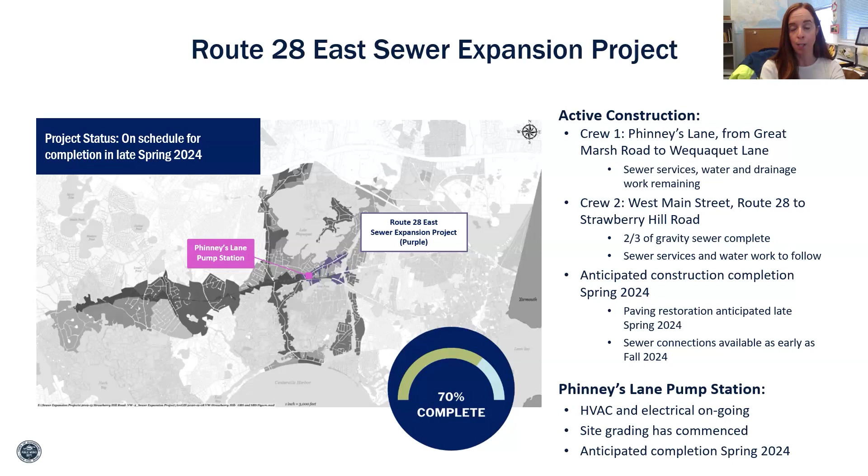Now we'll take a look at remaining construction as of February 15th of this year. If you remember from previous reports, we still had a lot of red on the screen. You're starting to see that red really decrease, which is great. That means our remaining gravity sewer, that really deep excavation and installation, is dwindling. We are working towards completion of the job.

Right now you'll see red remaining on West Main Street. As noted, about two-thirds of the gravity sewer is complete on that section of roadway. Just above that on Phinney's Lane, you'll see a dashed blue line indicating that the crew has moved on to sewer service laterals for each property identified along the project route, as well as our water and drainage work.

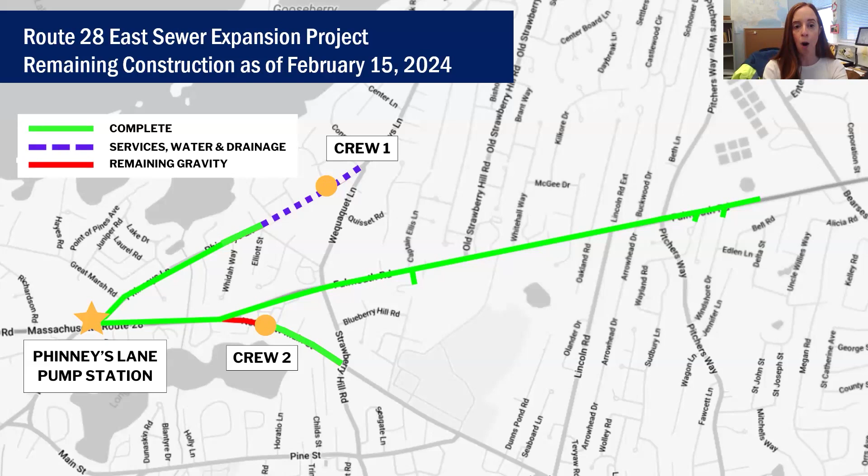Next, we'll shift over to the Strawberry Hill Road sewer expansion project. Not any real significant updates from the last report as we continue to work through project closeout and what we call our final project punch list.

Strawberry Hill Road Pump Station, we continue to work through testing and startup as we move to that pump station being fully functional. As previously reported, we anticipate first connections for portions of this project route to be available this coming spring.

We've been working hand in hand with the Board of Health and the Health Department on laying out communications in line with the Board of Health's sewer connection policy. We anticipate first connections being in the portion of the project route listed below.

So Phinney's Lane from Route 132 to Statice Lane, Wequaquet Lane from Quisset Road to Route 28, Strawberry Hill Road from Route 28 to Craigville Beach Road, West Main Street from Strawberry Hill Road to Old Strawberry Hill Road, and Craigville Beach Road from Strawberry Hill Road to Jackson Avenue. A lot of variety there in where you're going to start seeing those first connections, but it really makes up the bulk of this project route.

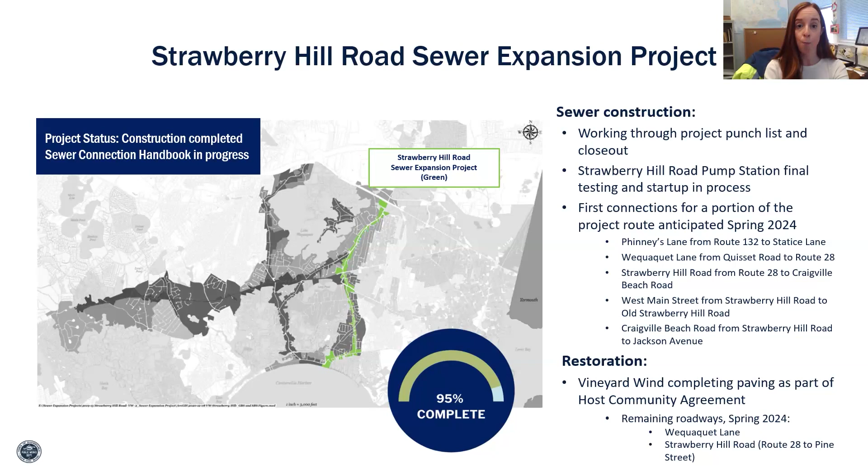As a reminder, restoration, we still have some small sections of roadway that need final restoration and paving, specifically Wequaquet Lane and Strawberry Hill Road from Route 28 to Pine Street. That restoration is owned by Vineyard Wind as part of their host community agreement, and they anticipate having that paving completed this coming spring once favorable paving conditions are available.

Now we'll take a look at the Centerville Village Sewer Expansion Project. If you remember from our last report, we had this item brought up, item 2024-093, which had a first read on January 18th of this year. We do anticipate a public hearing and vote coming up at the March 7th Town Council meeting.

That essentially is for the proposed phasing of this project. Last report, we talked about how a proposed northern phase was put on the table for Town Council to discuss. That would include essentially expediting all of the work on the northern portion of this project, which includes Mothers Park, the Mothers Park pump station, and a portion of the Route 28 West project, which is essentially Phinney's Lane to Old Stage Road. Why we were proposing this segmentation was to allow us to continue to make progress.

Obviously, there are some uncertainties with the proposed Park City Wind project, and by expediting this northern portion of the work, we are allowed to continue on our schedule and continue making progress as part of our CWMP sewer expansion. Also, it's important that we maximize our state revolving funds funding and the associated principal subsidy available from the Cape and Islands Water Protection Fund. By advancing this northern portion of the phase, we really put ourselves in a great position for those dollars.

Now, with that said, securing state revolving funds requires us to have a construction contract in place by this summer, so we do anticipate going out to bid in early spring. Following that, we have a Conservation Commission hearing scheduled currently for February 20th, to address work within our natural resources buffers, our wetland buffers, specifically for the work proposed in this northern phase and the Mothers Park location.

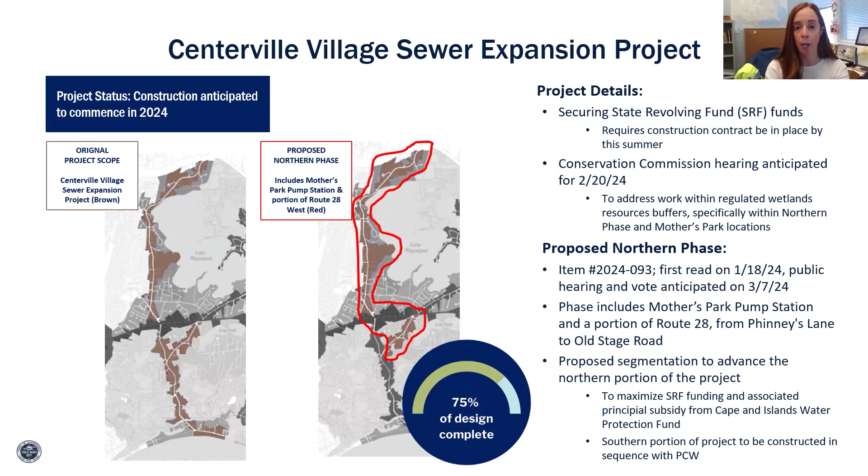Additional sewer projects in design - we have quite a number of them. As you may recall, we have 17 individual projects as part of phase 1 of the CWMP sewer expansion project. Out of those 17 projects, quite a few are here in design. About 80% of our projects at this point of phase 1 are in some level of survey or design.

The first being Route 28 West. Again, no significant updates here. We noted last time in our most recent report that the Route 28 West Sewer Expansion Project was the third ranked project in the 2024 intended use plan for our clean water projects here in the state. Preliminary design is ongoing, and we do anticipate construction starting in 2025. We have submitted our MassDOT permit applications, and we do intend to have a public information meeting, most likely at some point this year, before the end of this calendar year.

We also have the Phinney's Lane Neighborhoods Project, which continues to work through design. We are actually looking to retain a designer in the coming months to progress this project specifically to the final design phase, and we are continuing our private roadway utility easement takings and siting of sewer pump stations. Construction is anticipated to begin for this project in 2026.

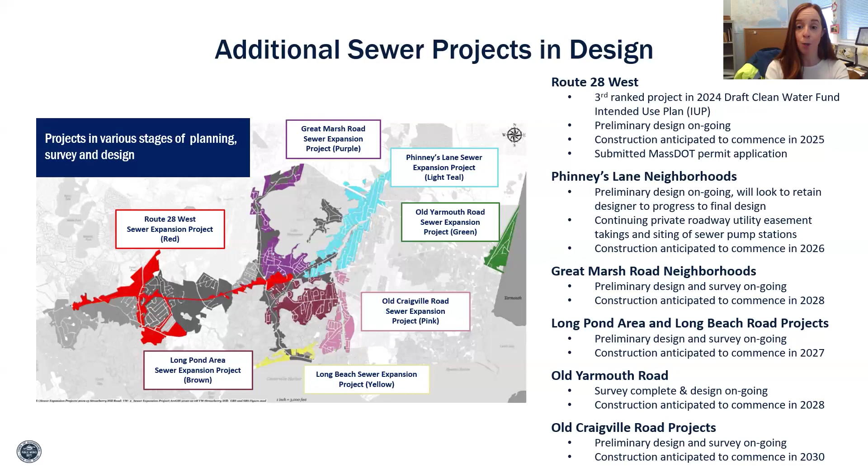Additionally, we have the Great Marsh Road Neighborhoods Project, Long Pond Area and Long Beach Road projects, Old Yarmouth Road, and the Old Craigville Road Sewer Expansion Project. All of those projects are in some level of preliminary design and survey, as we continue to do our survey work out in the field that will ultimately inform that design. Construction is anticipated on those projects to begin anywhere from 2027 all the way to 2030, and each of their anticipated construction start times are listed below the projects you see on your screen.

Next, we're going to shift over to the 720 Main Street Pump Station Replacement Project. This is a project that you've recently seen activity down on Main Street, specifically at 725 Main Street in Hyannis. This part of the project is not specifically related to our CWMP sewer expansion program, but rather it's part of the town's sewer pump station rehabilitation program. Previous evaluations of the existing pump station across the street at 720 Main Street determined that infrastructure does not have the capacity to handle existing peak design flows, and ultimately it's also approaching its end of intended design life.

Additionally, sewers on South Street are approaching capacity, and if we don't address that, that could restrict growth within the town's growth incentive zone. So ultimately, the decision was made to construct a new sewer pump station that could address all of those issues across the street on the town-owned property at 725 Main Street.

The pump station itself is a wet pit dry style pump station. It'll be a single-story concrete masonry walls with cedar shake veneer and asphalt shingle roof. On the next slide, I'll show you our most recent schematic that shows essentially what we envision the pump station to look like. The building itself will house the pumps, piping, odor control system, electrical systems, HVAC, and a standby generator as well.

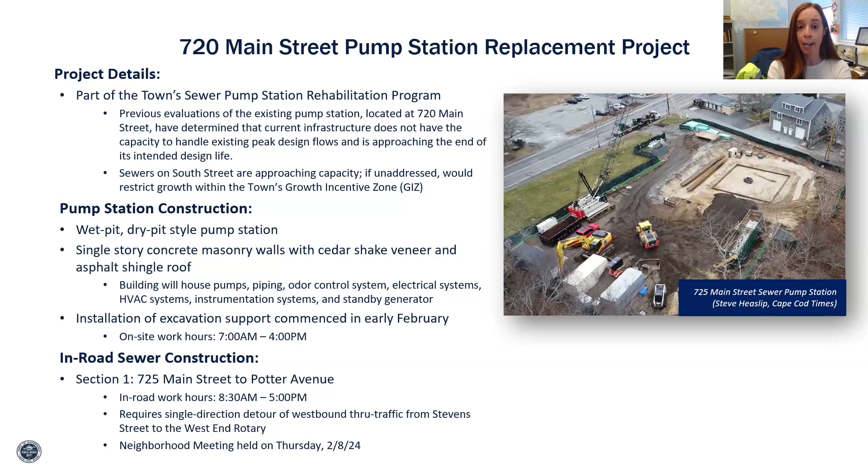And as promised, here is a proposed visual of the 725 Main Street pump station. This visual is essentially looking south from Main Street, so you'll see the shutters, the siding. We're really trying to have this building match the character and aesthetic of not just Cape Cod, but essentially that portion of Hyannis.

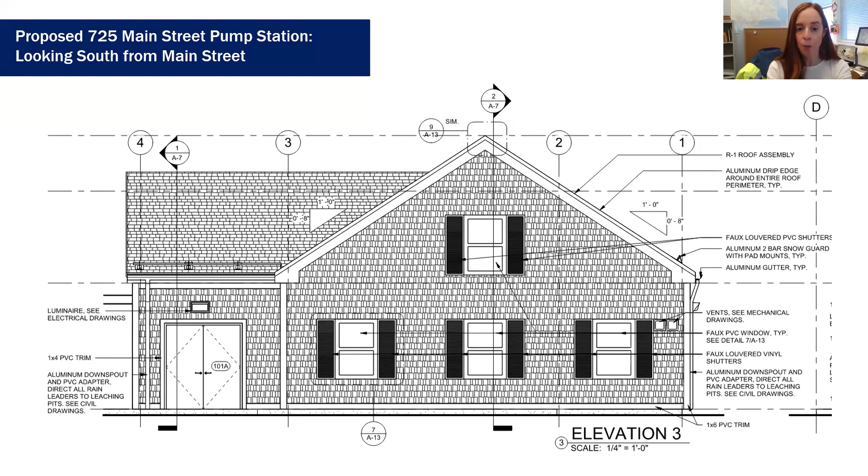Now we'll take a look at the water pollution control facility, where we've got a number of ongoing projects. The first is our solids processing facility upgrades. This project is essentially wrapping up—we expect substantial project completion by the end of this month, about two and a half weeks away. The next phase will be working through our project punch list so we can officially close out this construction portion. A lot of that remaining work includes things like pipe painting, which continues at the solids processing facility.

We also have the nitrogen removal and headworks improvements project, which is making headway—no pun intended. That is the number one ranked project in the 2024 Draft Clean Water Fund intended use plan, pointing to the significance of this program, specifically this project, as part of our CWMP. As of last report, our basis of design report is in review and we're preparing to move into final design. The bid has closed for the MBR, and we are currently reviewing applicants. Once we have that MBR selected, that's really the cornerstone piece helping us move into final design. We're making great progress, and we anticipate construction to start on this project in fall of 2025.

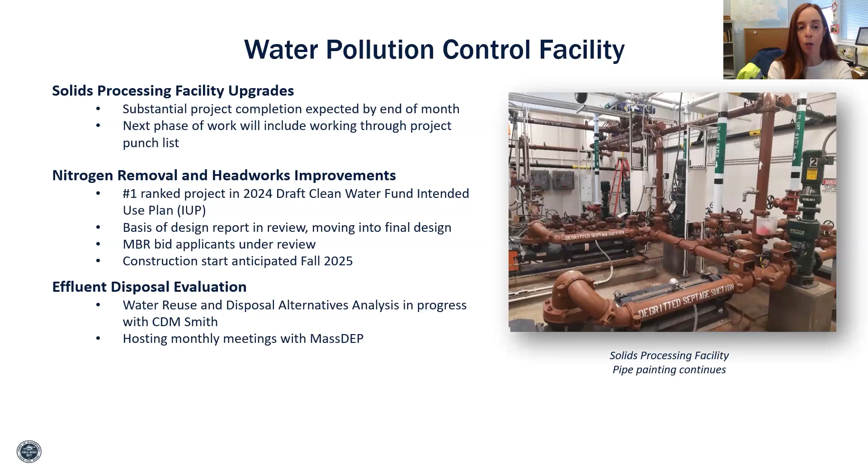Lastly, regarding the water pollution control facility, we continue to make progress on the effluent disposal evaluation. We continue working with our consultant, CDM Smith, on water reuse and disposal alternatives and the analysis that comes with all the variables there. We are also hosting monthly meetings with the Massachusetts Department of Environmental Protection as we work through potential solutions for our effluent disposal.

Lastly, we'll take a look at water quality—three water quality projects continuing to progress. The first is the APCC, Association to Preserve Cape Cod's Boat Ramps Stormwater Improvement Project. As you may remember, Shubael Pond was selected by the APCC. An existing condition survey plan is now under review as of our last report, and design continues to progress through the 25% set plans. We anticipate a public participation meeting this coming spring as we advance further through design, so we can share project updates and take comments from the public.

Additionally, we have stormwater improvement projects at Clamshell Cove Road and Old Shore Road, Cotuit. As of last report, we've had our kickoff meeting, and both projects will now be completed together. We've also moved towards a wetlands delineation survey on Old Shore Road, which is in progress. We continue to work closely with the NRCS, the Natural Resources Conservation Service, which provided a grant to fund these drainage improvements that will ultimately help reduce stormwater inputs into the Shoestring Bay estuary.

Lastly, we've made some progress on the Long Pond, Marstons Mills floating treatment wetland. This is an exciting project for us—we have our request for quote out, issued on February 12th of this month, and we are in the process of procuring our recommended plants for deployment from New England Wetland Plants. We are anticipating a spring deployment this year for this project.

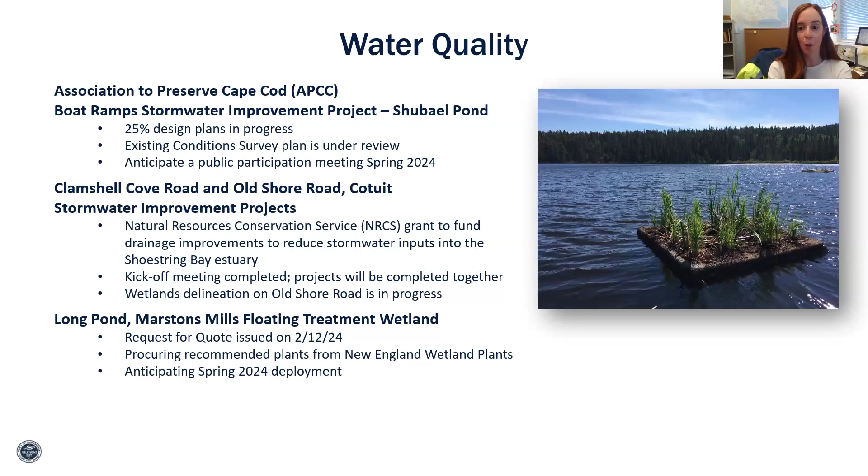That concludes our water resources update. Thank you.